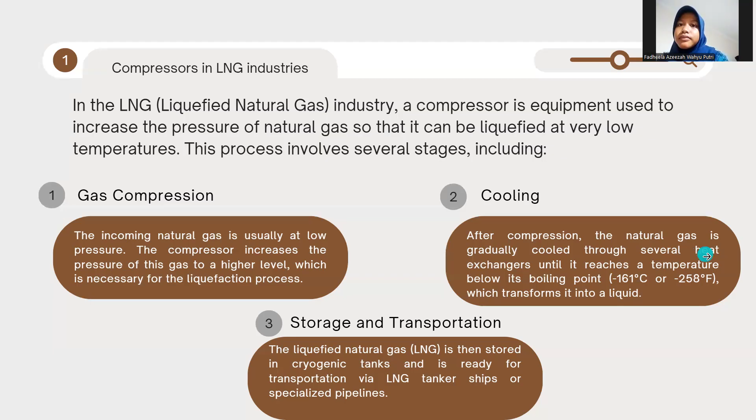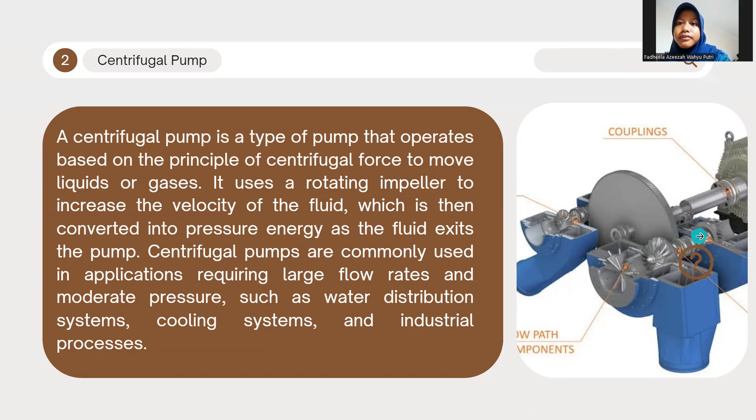Okay, here are the four working principles of a centrifugal pump. First, the suction process. Liquid from a tank or source enters the suction pipe. The liquid is directed toward the eye of the impeller, which is the center of the impeller. A pressure difference between the liquid source and the low pressure at the impeller allows the liquid to flow into the pump. This low pressure is created by the rotation of the impeller, which generates a negative pressure zone at its center.

And then kinetic energy increase. The impeller rotates at high speed, driven by the motor. When the liquid reaches the impeller eye, the impeller blades transfer kinetic energy to the liquid. The liquid is spun rapidly by the blades and thrown outward due to centrifugal force. The velocity of the liquid increases significantly during this process.

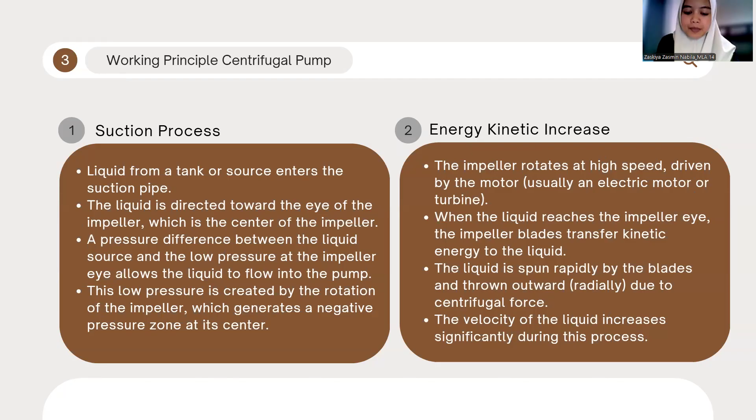Conversion of kinetic to pressure. The liquid exiting the impeller enters the volute casing. Inside the volute casing, the velocity of the liquid decreases gradually, and the kinetic energy is converted into pressure energy. The pressure of the liquid increases, enabling it to be transferred to a higher elevation or a system with higher pressure.

And the last, the discharge process. The high pressure liquid is discharged through the discharge pipe. The liquid pressure is sufficient to push it to its destination. The flow of the discharged liquid is often controlled using a valve to maintain the required pressure and flow rate in the system.

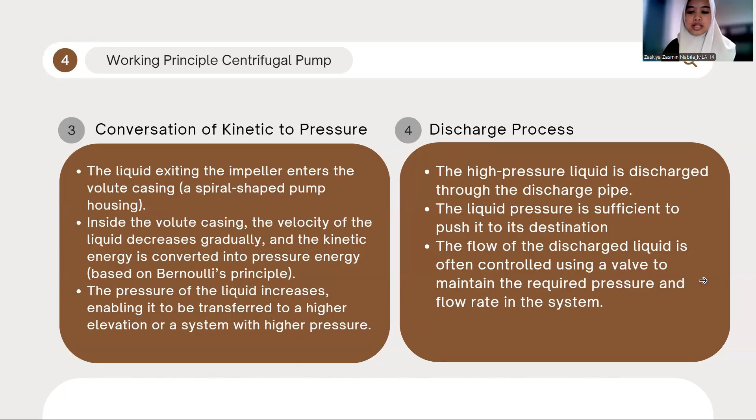Okay, next, definition. Integrally geared compressors or IGCs are a type of compressor that use multiple impellers mounted on different shafts, all connected through a central gearbox. Each impeller is typically arranged in a different stage, allowing greater control over the compression process and increasing efficiency.

And then working principle. Number one is the central gearbox. The central gearbox distributes power to several shafts, each with one or more impellers. And then multi-stage compression. Gas is compressed in multiple stages, with each stage handled by a different impeller. This allows for gradual compression of the gas, helping to achieve higher pressure more efficiently. And then speed control. The speed of each impeller can be independently controlled, allowing for optimization of efficiency at each stage of compression. Next.

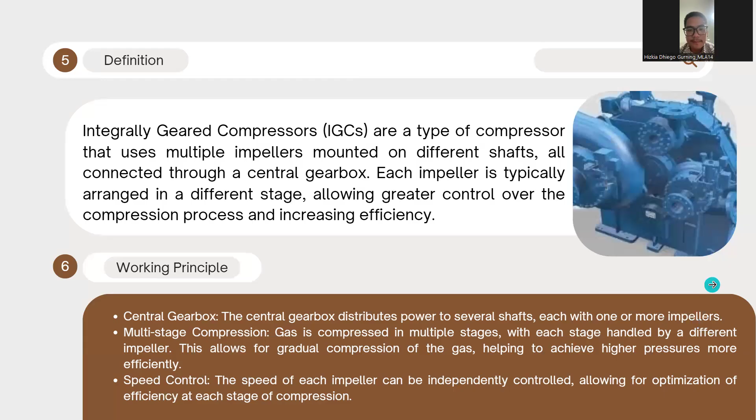And then main components. First is the gearbox, the central part that distributes power to various impellers through connected shafts. Impeller, the rotating component that accelerates and compresses the gas at each stage. And then diffuser, the stationary part that converts kinetic energy into pressure at each stage. And then intercooler, a heat exchanger used between stages to cool the compressed gas before it enters the next stage, enhancing compression efficiency.

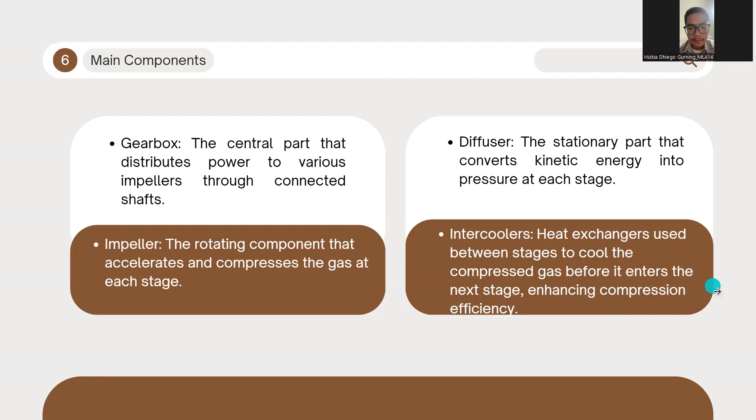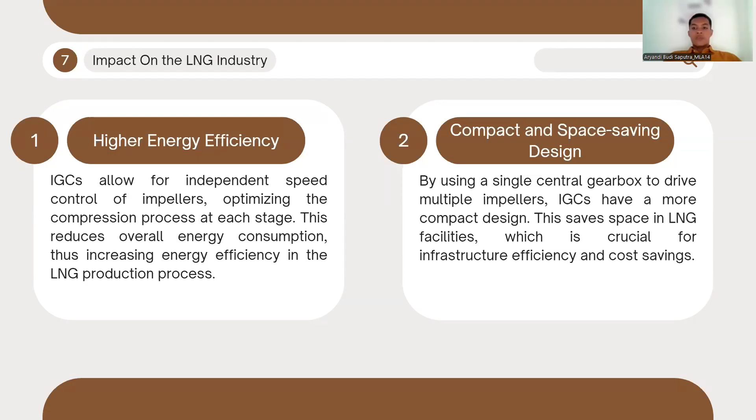Okay, impact on the LNG industry. One, higher energy efficiency. IGCs allow for independent speed control of impellers, optimizing the compression process at each stage. This reduces overall energy consumption, thus increasing energy efficiency in the LNG production process. Two, compact and space-saving design. By using a single central gearbox to drive multiple impellers, IGCs have a more compact design. This saves space in LNG facilities, which is crucial for infrastructure efficiency and cost saving. Next.

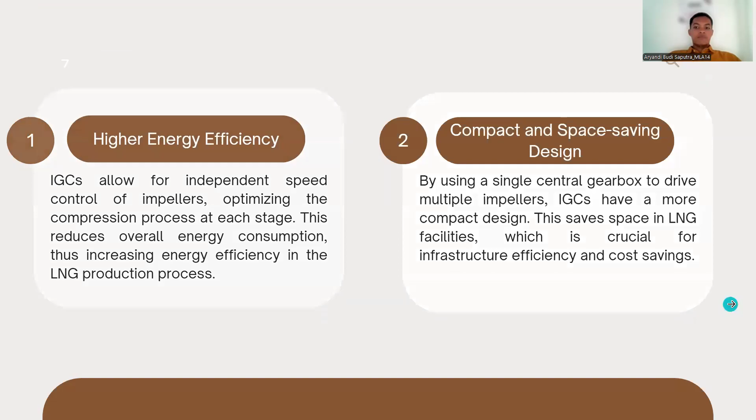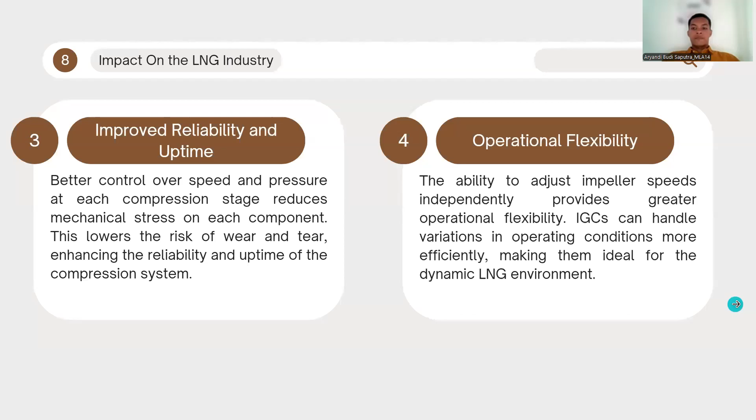Three, improved reliability and uptime. Better control over speed and pressure at each compression stage reduces mechanical stress on each component. This lowers the risk of wear and tear, enhancing the reliability and uptime of the compression system. Number four, operational flexibility. The ability to adjust impeller speeds independently provides greater operational flexibility. IGCs can handle variations in operating conditions more efficiently, making them ideal for the dynamic LNG environment. Next.